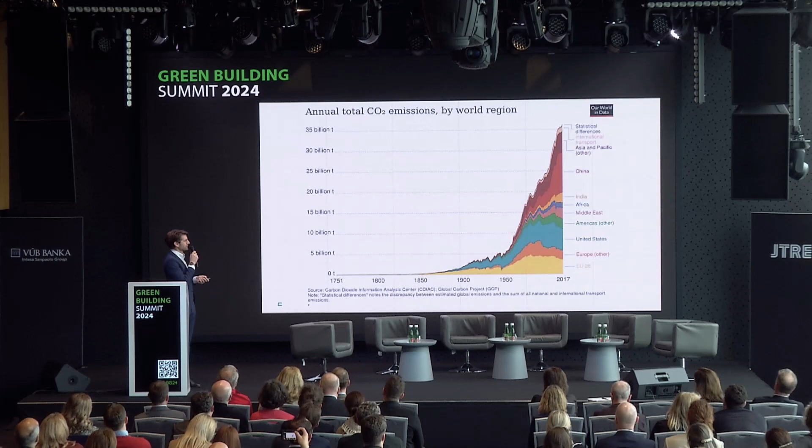And the CO2 is a gas. It stays in the atmosphere. And then the rays of the sun are trapped. And therefore, there is an increase of the temperature of our planet. We don't want that. Or at least we know that the higher the average temperature goes, the worse things happen. And again, we should avoid that.

So right now we are at 1 degree average increase. We should at least stay around this data. And to avoid that, we need to change, of course.

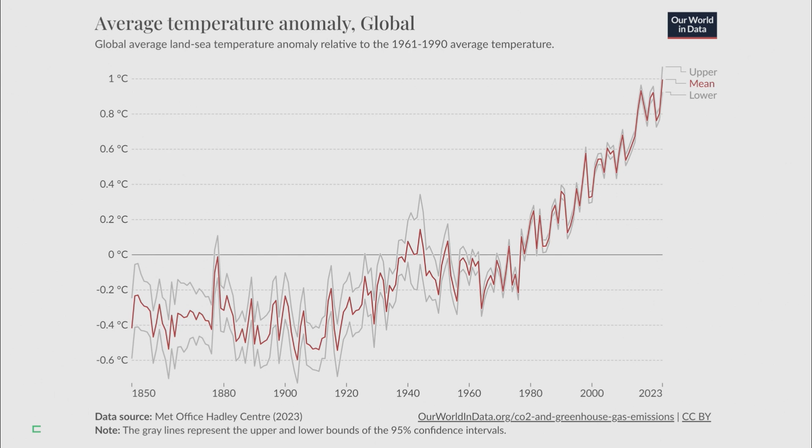And I really like the Casper presentation where there are these 2 dogs and the owner is trying to pull them to the sea, because there are a lot of things that we need to change.

And the world is going to the net zero target approach. What does it mean? That all these countries here have pledged. Finland is actually one of the first. They say by 2035, we are going to be net zero. And net zero means everything, not only construction. We are talking about construction here, but every aspect of our life. So the clock is ticking. We need to do something, and we need to do it fast.

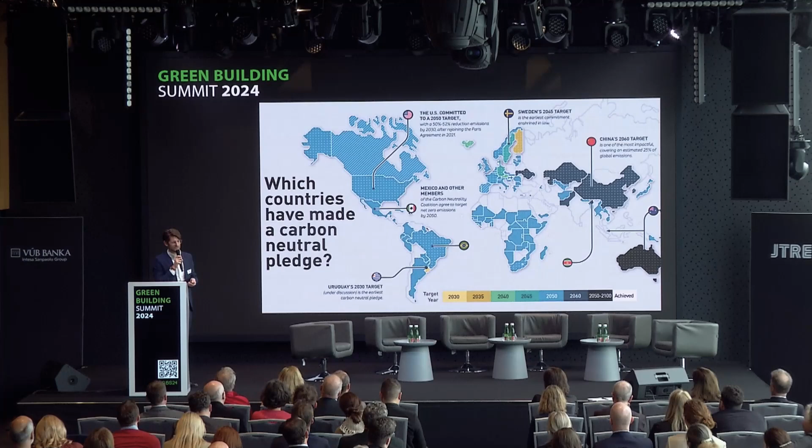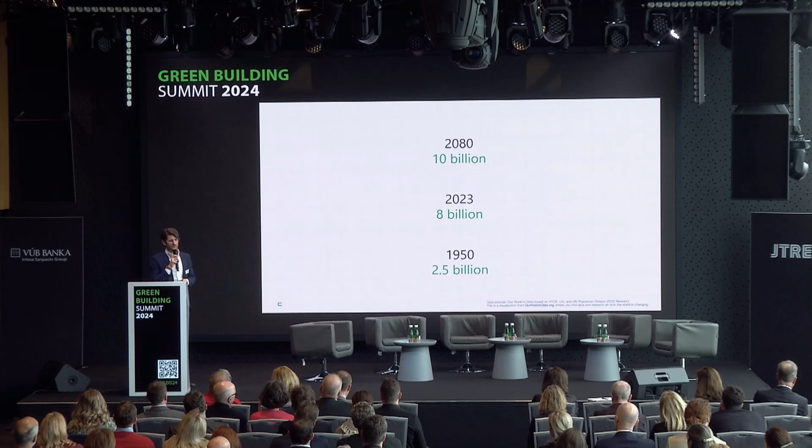And parallel to this, it's true, maybe we will need fewer offices in the future, but the number of people is increasing massively. In 1950, we were at 2.5 billion. Right now, we are 8. And in 2080, probably we will be 10 billion. We need to house these people. We need to have offices for these people. We need schools for these people. And also, maybe in other parts of the world, they look at Western society as a reference. That, I think, is also important.

So what would be the natural strategy to house and build those new projects? Well, until now, we do multi-story timber buildings, and we have actually 5 ways to do that. Here I collected, I mean, maybe there is also steel, but let's keep it to 5.

So we have concrete. Everybody knows how a concrete building is built. Then we also have prefabricated concrete, and there are some interesting examples out there. For smaller buildings, also low-rise buildings, we have timber frame. We have mass timber, I don't know how many of you heard, but it's a pretty trendy material right now. And last but not least, we have timber hybrid, so a combination of these materials. These are the 5 solutions that right now we have to tackle the construction problem.

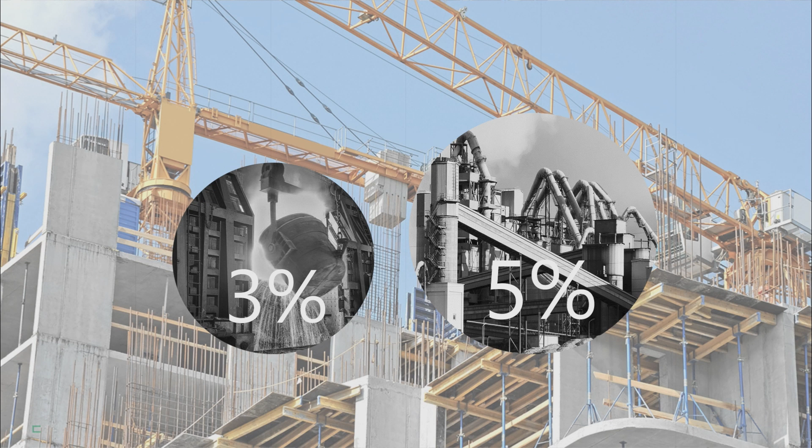And this natural, obvious solution right now is to use concrete. We did it for probably 100 years. The supply chain is there. Everything is organized. But remember the first slide: we need to reduce CO2 emissions. And those 2 materials, concrete and steel, together are 8% of the yearly CO2 emissions of the construction sector. It's a fact, and we need to work around this.

And Mother Nature gave us a gift: it's timber. It's a beautiful material. Finland is one of the great producers of it. And for many years before concrete, we used timber for our construction. And right now, we are also able to do multi-story timber buildings. They are popping out all over the world. That was part of my PhD, to study them, understand them.

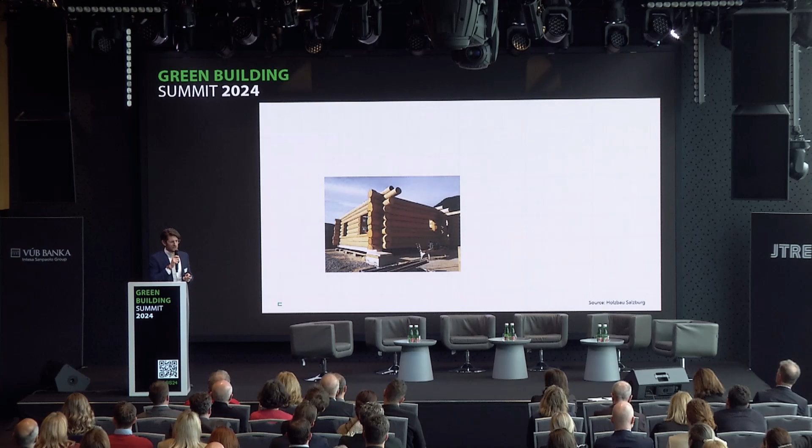But what is important for you to understand is that you can ask yourself, okay, but why did we not build with timber 100 years ago, like the structures I showed you before? Well, it's important because usually the usual process was this one: you take a trunk, you cut it into 4 pieces, and so you have this regular shape. And then the carpenter or the framer would take it and then use it in construction. Simple. It was good for small buildings, but it's a natural material. And engineers, especially in modern times, they really like to calculate things, predict things.

And with this natural material beauty, you cannot really predict it, because maybe there are some knots inside, or some irregularities that you can't really understand.

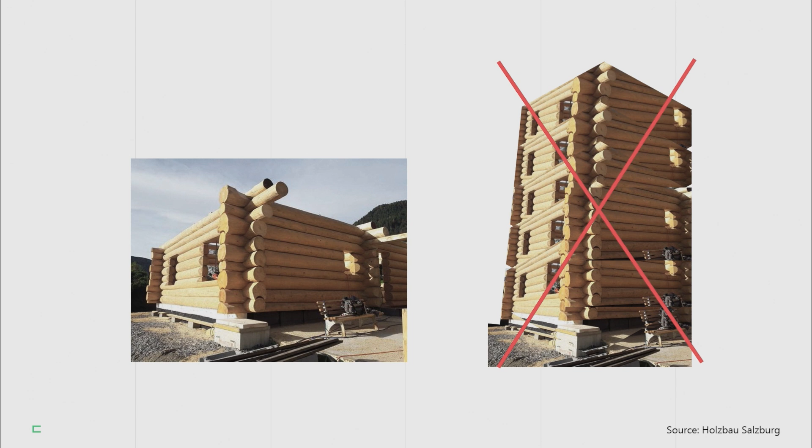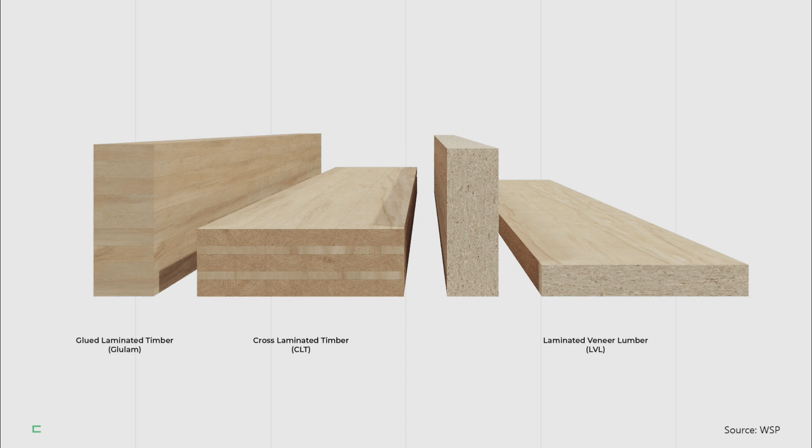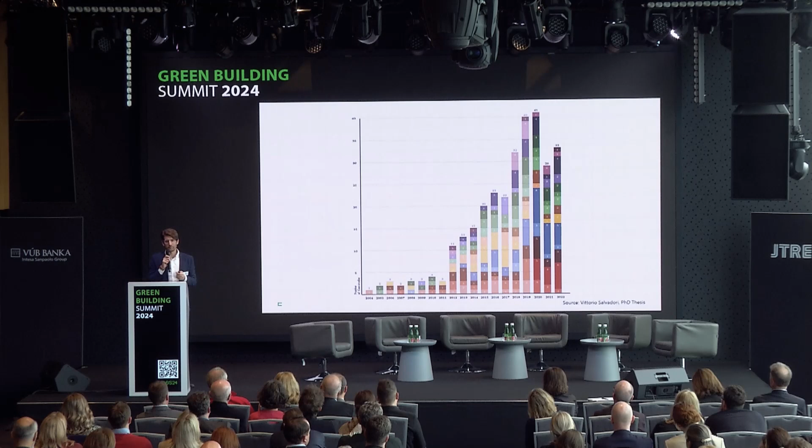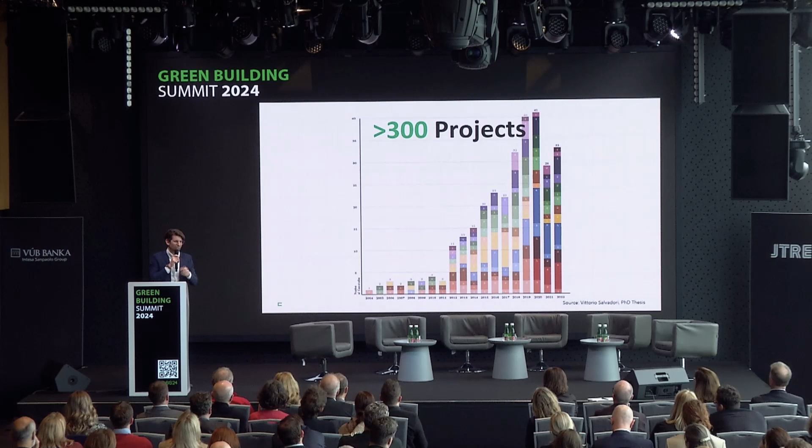This was part of my PhD. So if somebody asks how many multi-story timber buildings are completed in the world, the answer is more than 300. This different color represents more or less the countries. Most of them are in Western societies, let's say. So this was important, and I think it's a good answer for some situations.

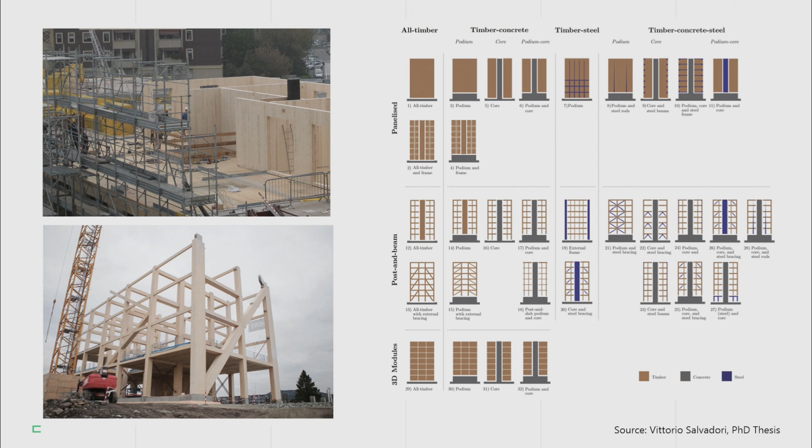You can have load-bearing walls made of timber, or gigantic post and beam structures. This is an example in Norway. What I found out is that there are at least 32 different ways to build multi-story timber buildings. Actually a lot of them are hybrid, and I'm coming to that a little bit afterwards. But let's pretend for the sake of it, it's okay like this.

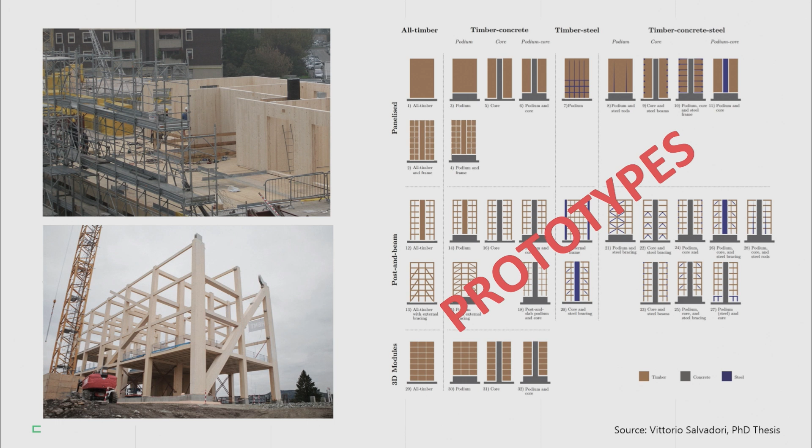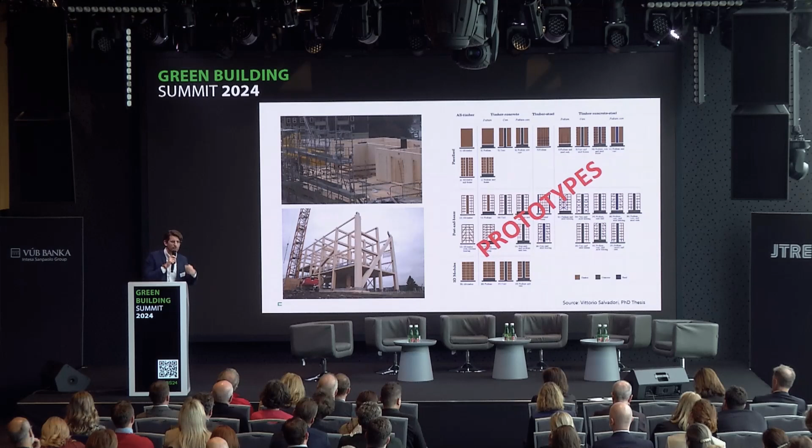What's the problem? Remember, we need to find a solution, and we don't have time, to scale sustainable construction. All those buildings, or most of them, are prototypes. What does that mean? A developer commissions an architect who comes up with a project, then commissions a structural engineer, who bases calculation on this specific project, and then they contact the supply chain. That was good, and it's necessary to do this, but if we want to scale, this is not the right approach.

Why? Because you need to reinvent the details and the connection every time for most projects. So if you remember the 5 options, let's look at them together. If I want to scale construction, what could I do? From a time perspective, what gives me the quickest construction possible, especially now with high interest rates, that would be an advantage. Well, prefabrication is the right approach.

Concrete buildings are very slow, everybody I think has experienced that. But they're cheap, the supply chain already exists, so of course they're cheaper, some countries a little bit more than others. But the problem with mass timber is that it's a sustainable, beautiful material, but it's expensive. Remember, some of these products are only 20 years old, so the supply chain is developed, but not as we want to scale, especially globally.

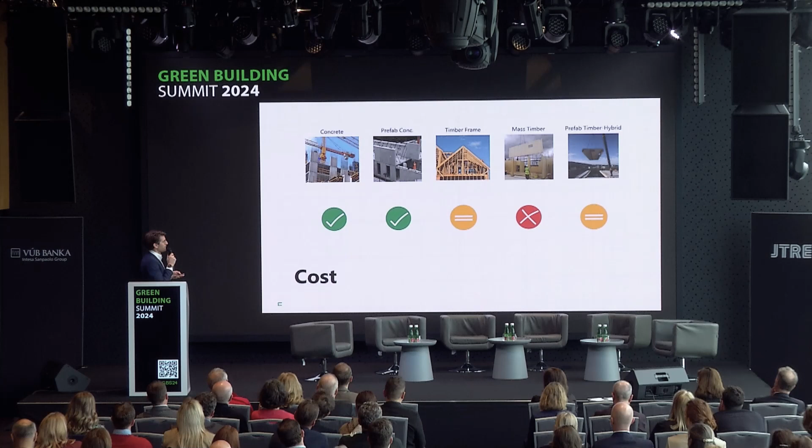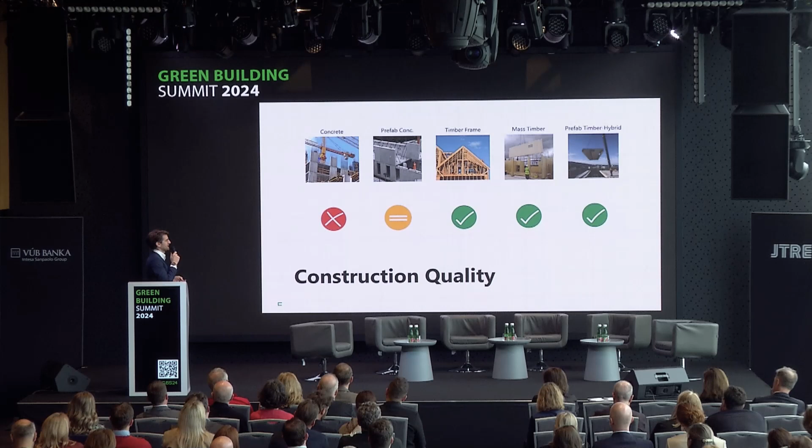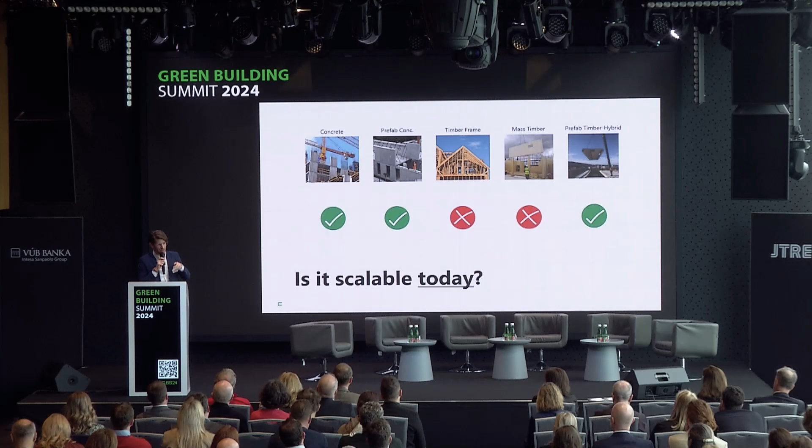And if we look at the quality of the buildings, timber wins hands-down. Because construction, especially with concrete, you need to repair, there are some uncertainties on the building side, and you need to change it. Prefabricated timber hybrid, in this case, wins especially well. But if we need to find a solution that is scalable today, remember, today, and I will show you the example of CREE, well, you need concrete, prefabricated concrete, or prefabricated timber hybrid, because it uses a low amount of timber in this case.

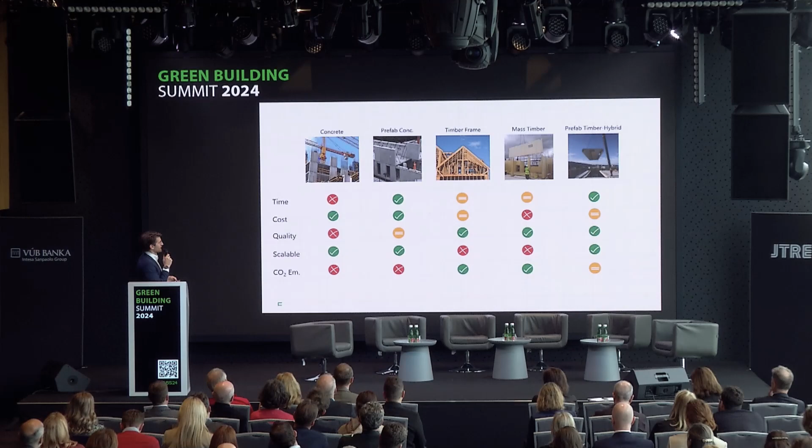Last but not least, okay, we found 3 alternatives, but what about the CO2 emissions? Well, we say that concrete and prefab concrete are actually bad for the environment, so we need to find alternatives. If you look at the options we have, this is the overall sum up, but we can remove timber frame. Why? Because it's not scalable for multi-story buildings.

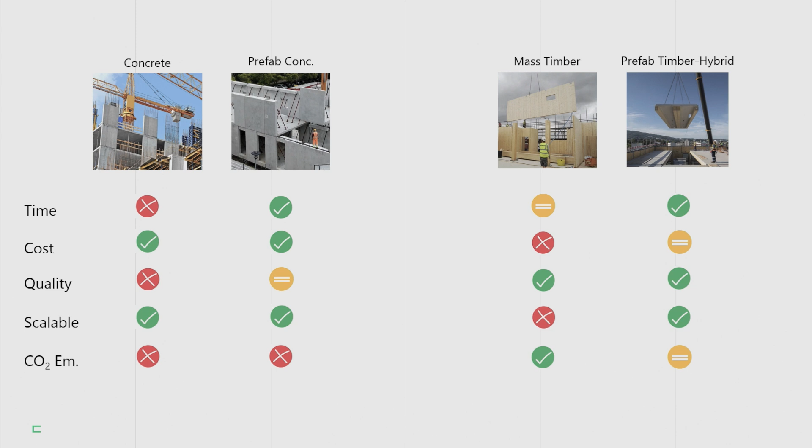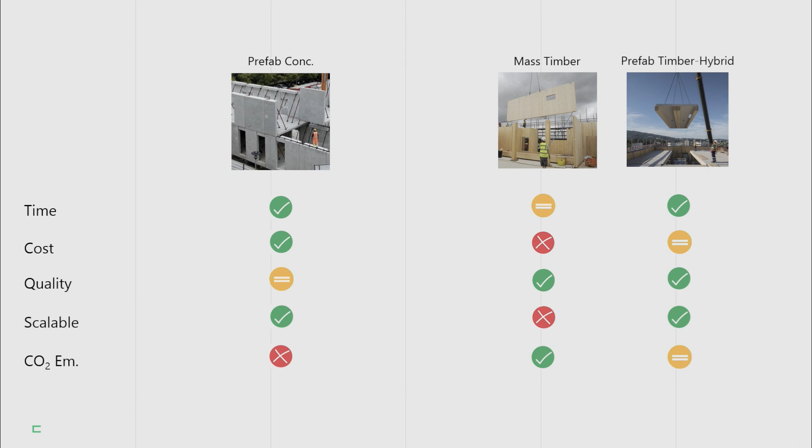Yeah, you can do low-rise, but not high-rise. We can remove concrete because, yes, it's cheap, but it emits a lot of CO2, is imprecise, and the construction is very long. We can remove mass timber because, yes, it's sustainable, probably the most sustainable material we have, but it's not really scalable, and that's what we are searching for.

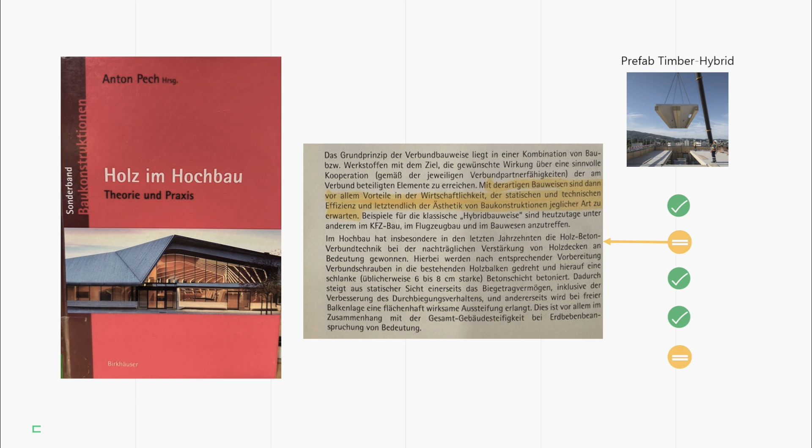So we are left with 2 options, prefabricated concrete or prefabricated timber hybrid. There is one winner here, and in our opinion, timber hybrid wins. But there is a problem, and it's the cost part. We know that real estate developers ask us, okay, but I have two options, prefabricated timber hybrid and concrete. Why should I choose something that costs more?

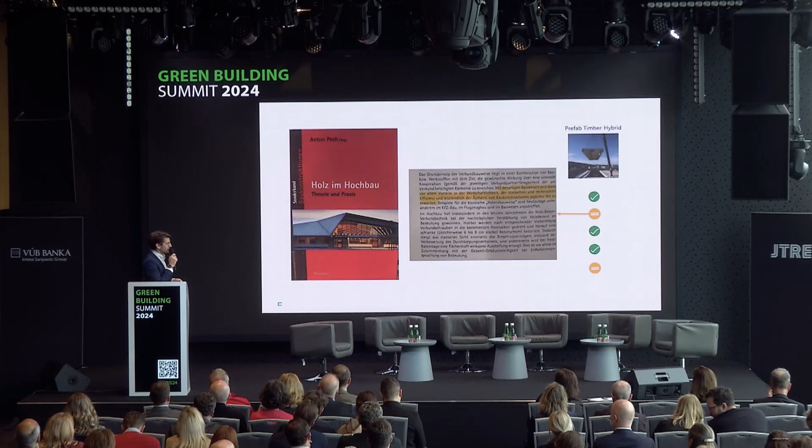It's true, it costs more. But what the academia says, and also the practice, is that timber hybrid is perfect for construction quickly, high quality of the building, and also supply chain, but has high engineering costs.

So it's a particular solution, and you need to rely on expert companies, people, and stakeholders to manage such a building. That's when CREE comes in. Because what we do is say: client, we already figured out all the details, all the standards. We reduce the engineering entry cost by using a system, because it's a systemized approach. And what we did already 12 years ago is exactly that.

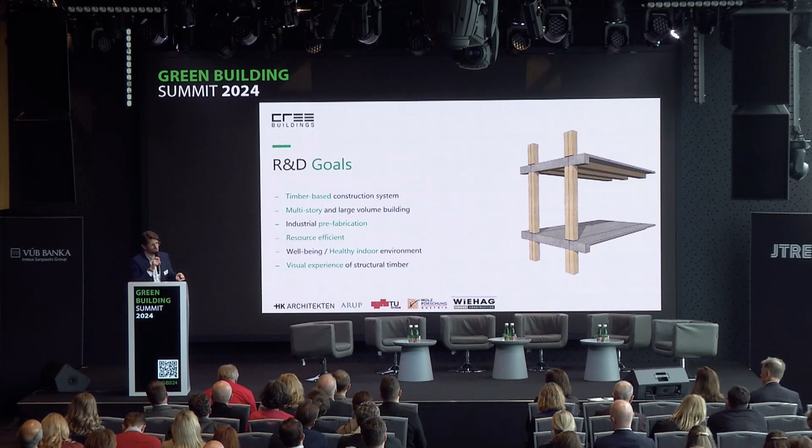We searched for a solution that is timber-based, perfect for multi-story, good in prefabrication, and resource efficient. What does it mean? I'll show you some data, but we use the right amount of material, not too much and not too little timber. This helps us scale it and reduce the cost, which is important. Last but not least, we want timber to be visible for the quality of the users, as Casper said before.

So the story, the journey of CREE is composed of three parts. We have 3 years where we developed our solution. Then we have a part where we mastered the CREE system by building our first reference. At the time, that was the tallest timber building in the world. And then we mastered the solution by operating as a general contractor, building different typologies, assets, and in different locations.

But after that, the success of our solution was big enough that construction companies were asking us: okay, I understand your system, I can see it implemented in Singapore, in France, in Canada, teach me how to do that. That's why we changed our business model and became a consulting company. We are involved with any stakeholder on the project, no matter where we are located in the world, and we teach them or suggest our solution in order to reduce the cost and scale it globally.

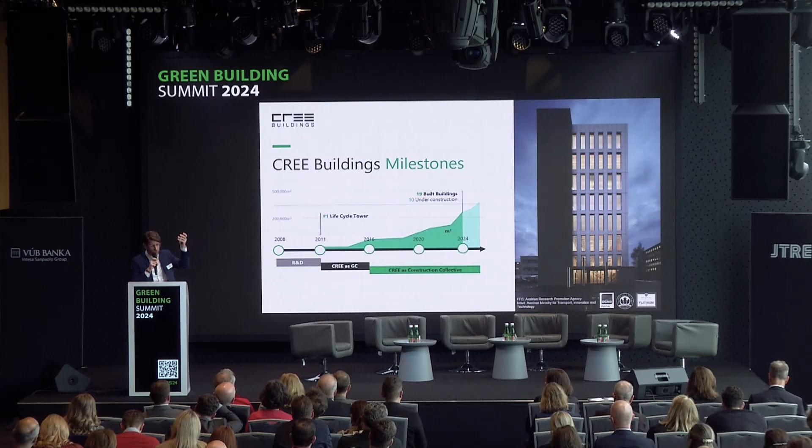This was a good idea because now we partner with construction companies all over the world, and we have completed 19 buildings, with 10 under construction right now. Remember, if we need to find a solution that scales, CREE took 10 years to scale. Now we are seeing an increase, but the fear I have as an expert in timber buildings is that yes, we can develop a solution now, but the time it takes to scale is 10 years.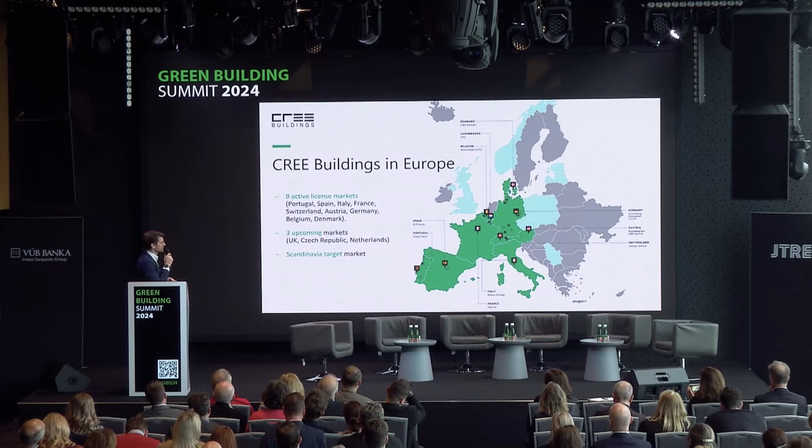And Finland needs to be net zero in 2030. We don't have time. So now we operate in Asia and North America as well, but here you see the location—we are present in Europe, not yet in Slovakia. Maybe after this presentation we can find some partners. But overall, we are strong in Germany, in Spain, all over these developed countries.

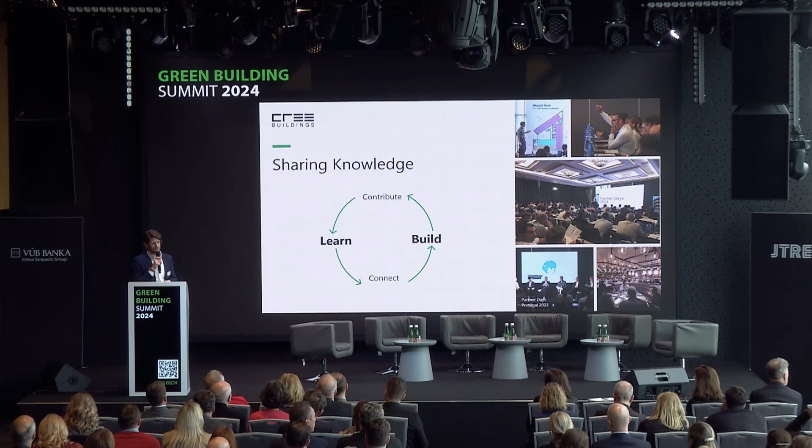The key aspect of CREE, the key message we share with our partner companies, is that if you team up with us, you need to tell us everything you learn in these projects. Every CREE project has new technical details, new innovations, and our role at CREE is to collect information and share it with all our network. This is a true network effect, and so the learning curve of the entire collective is much higher. We also meet once a year to discuss all that stuff.

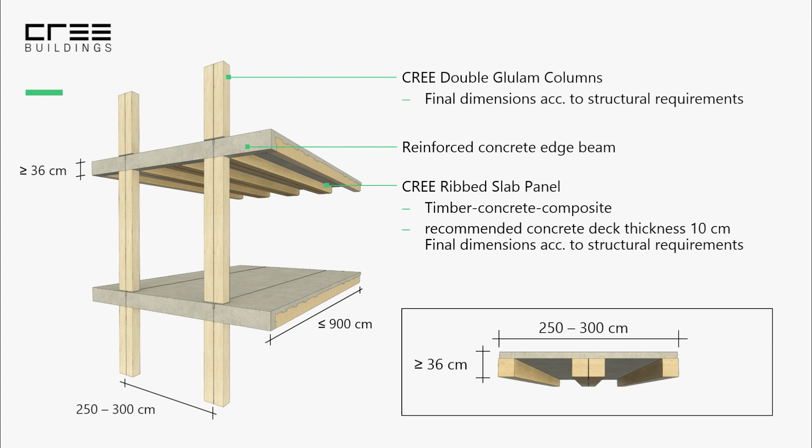So what is the CREE system? You saw a picture before. It's a post and beam structure, load-bearing mass timber columns, connected with concrete timber prefabricated floor slabs, in a nutshell. Here you see between 2.5 and 3 meters and a 9 meter span. These numbers can change, but because we prefabricate the element from point A to construction, we need to transport them, and we compete with concrete, so we need to be as cheap as possible. So what we figured out is that if we stay within this measurement, we can transport the element without special permissions, and this reduces the cost.

Usually a CREE building is composed of a core made of concrete, but you can imagine different things too—our Japanese friends do it with steel. You always have the columns which are directly attached to the external facade. This is a key aspect when we assemble the buildings on site. Middle girders are made of steel or concrete, and then the floor slabs close and seal the building.

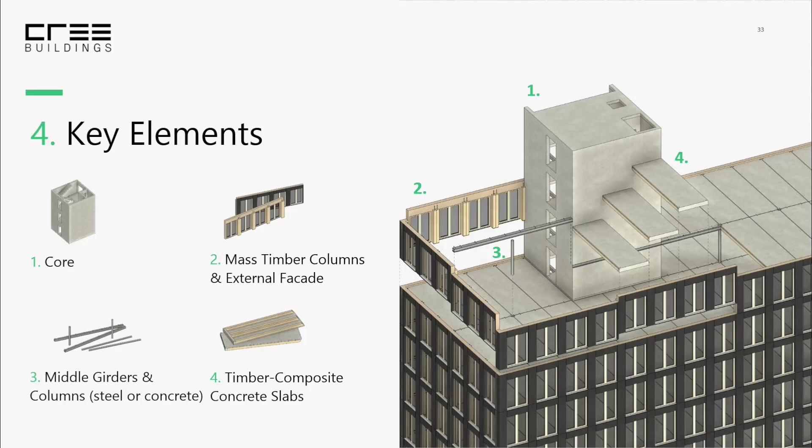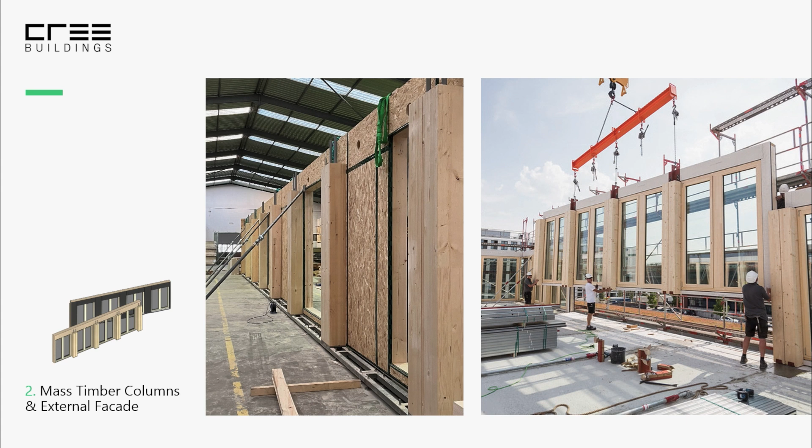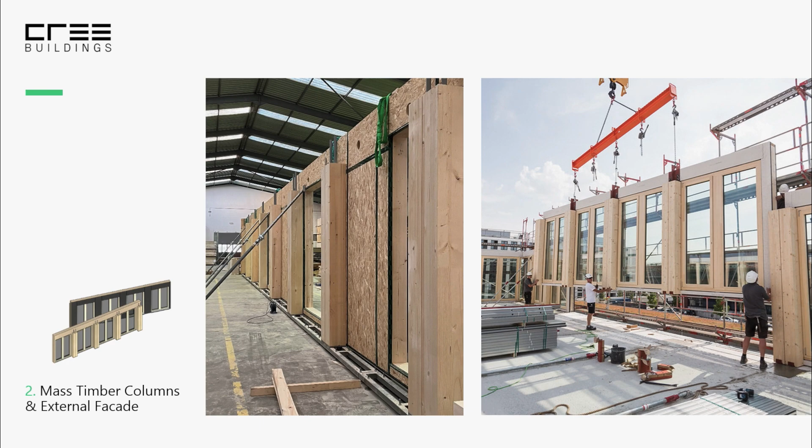This is a picture from Portugal. The Portuguese didn't have a lot of timber knowledge, and what we did is transfer the know-how to develop prefabricated timber elements and bring them on site like you see on the right. This knowledge is coming from Austria, it's pretty common in Germany and Switzerland as well, and our job is to transfer these capabilities to any company that wants to work with us, already in the first project.

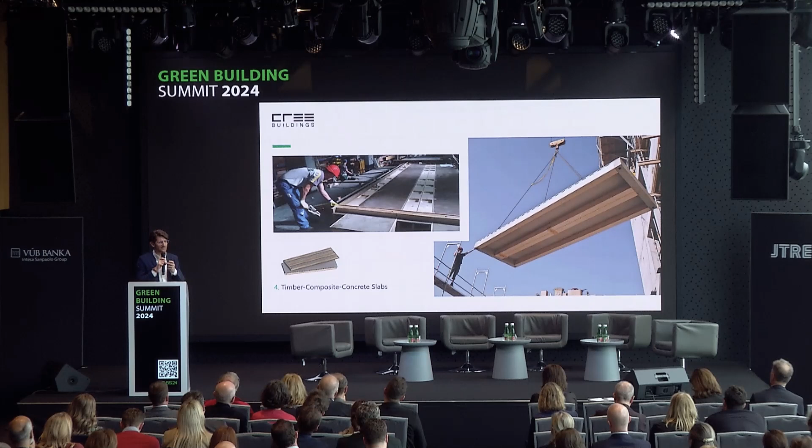This is a picture from the off-site production facility that we can set up in any country in the world. We did it in Singapore, Canada, and Europe. On the right, you see how the element is brought to the building site.

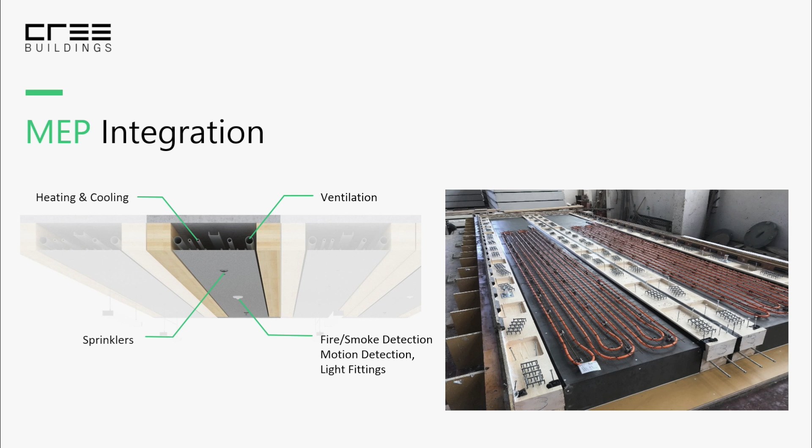We also integrate heating and cooling. For example, a new thing that we started in Germany is to put heating and cooling pipes in the concrete layer before we pour concrete. So we have a low-tech solution, and the moment the element arrives on the building site, it's ready to go, to warm up or cool the building.

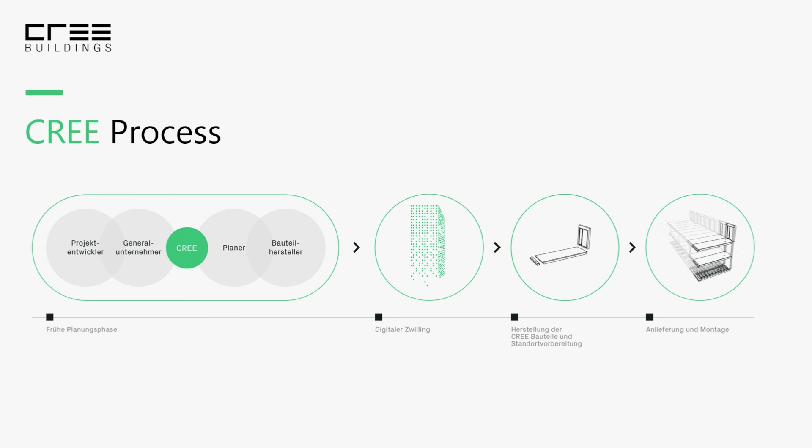What's the trade-off? Everything fine, everything nice, but if you're a developer, what do you need to do to achieve scalability, sustainability, and cost competitiveness? Well, you need to involve us, or companies like us, early on, because we can tell our clients early what could go wrong. We build up a digital twin, we quantify the material, and then we assemble the building pretty fast because we know the components.

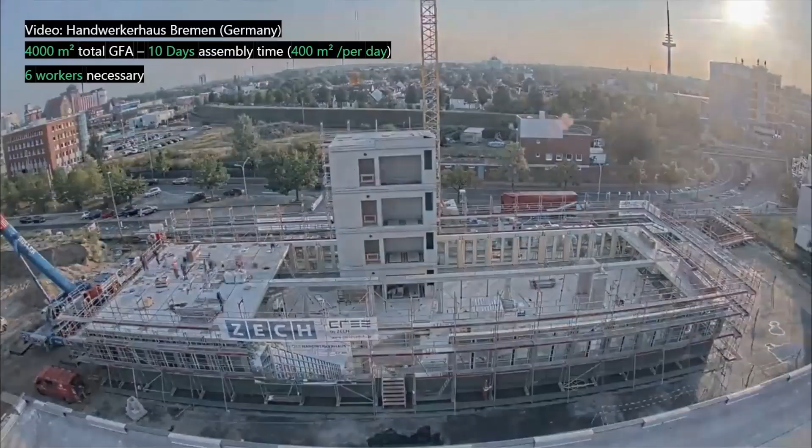This is a video of a 4,000 square meter building in Germany, completed 4 years ago. The client followed our suggestions and it was assembled in 10 days with a crew of 6 people. That's another big challenge, we don't have the workforce on the building site. Well, here you need just 6 people.

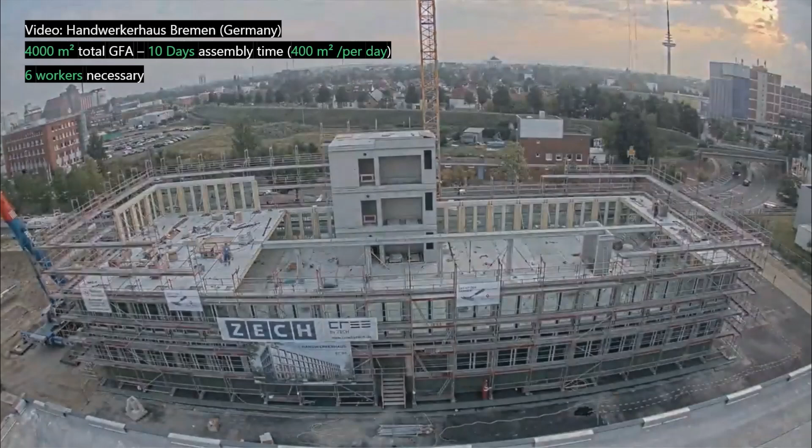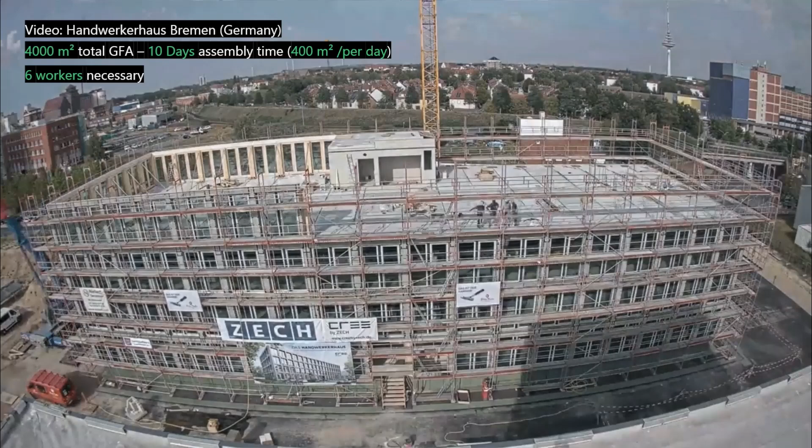The core will assemble 2 weeks in advance, and then the process is always the same: you place the facade with the load-bearing columns, the middle girder, and the floor slabs, again and again and again. Especially on the last floors, it gets really faster.

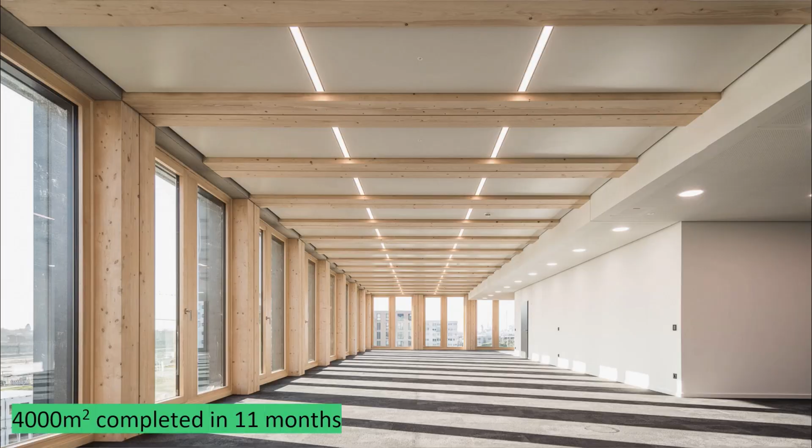What do you get? You get a building that, after you seal the floor slab, is water and airtight. And the interior, in this case after 11 months, looks like this. This is a typical size for any multi-story building in Europe, and we completed it in 11 months.

With timber present, yes, we use concrete, but timber is the protagonist in our buildings, and it brings quality also inside. So we've built several buildings, more than 30.

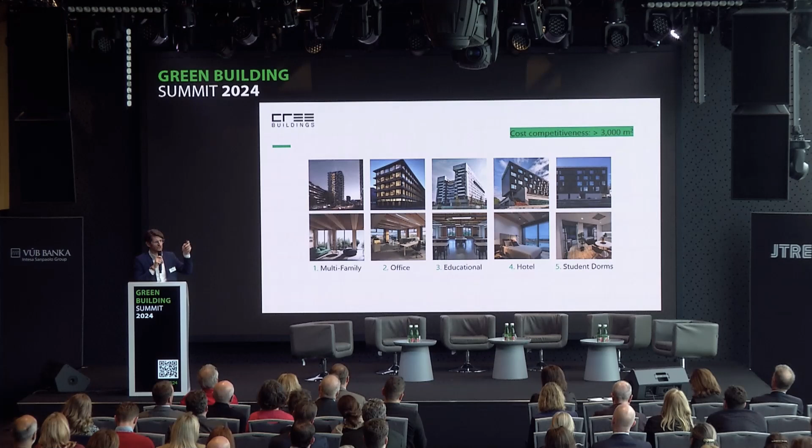What I want to show you today is that we are really good in multi-family, offices, educational buildings, hotels and student dorms, because they're very repetitive. What drives the cost of a CREE building is the floor slabs, because it's 70% of a building. And the more repeatable the floor slabs are, the lower the cost per unit. This is really good, especially in those assets over 3,000 square meters, because you can repeat the floor slab as much as possible.

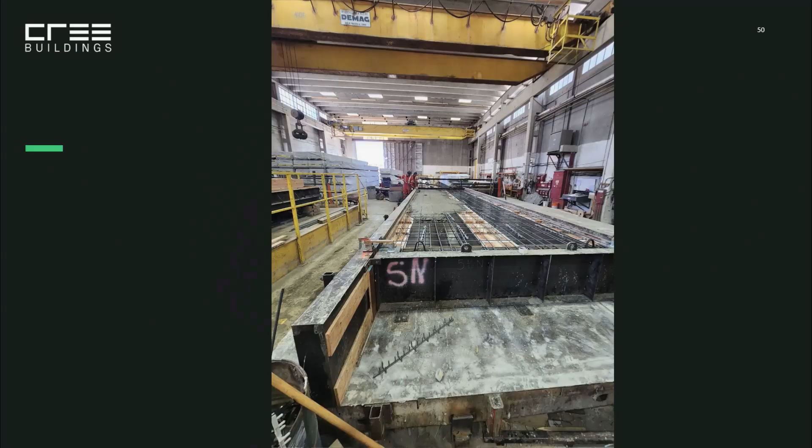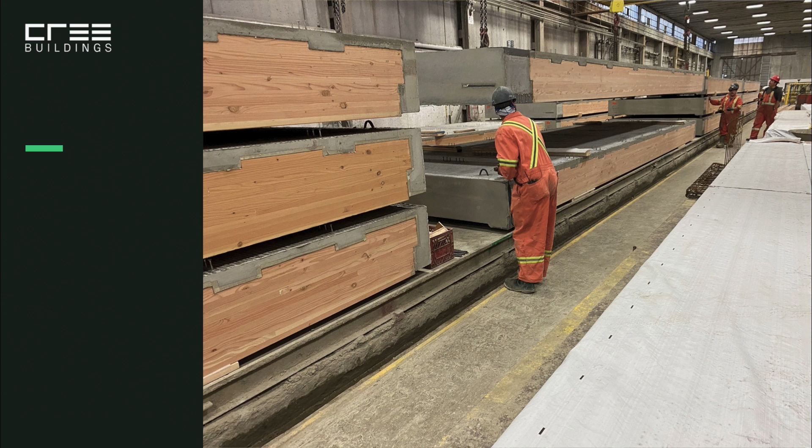And the story of this building is always the same. CREE, together with a local Canadian partner, searches for a local precast company that never did timber hybrid construction. We teach them how to do our solution. We also have a patent to do this. And here you see our Canadian friends producing the elements.

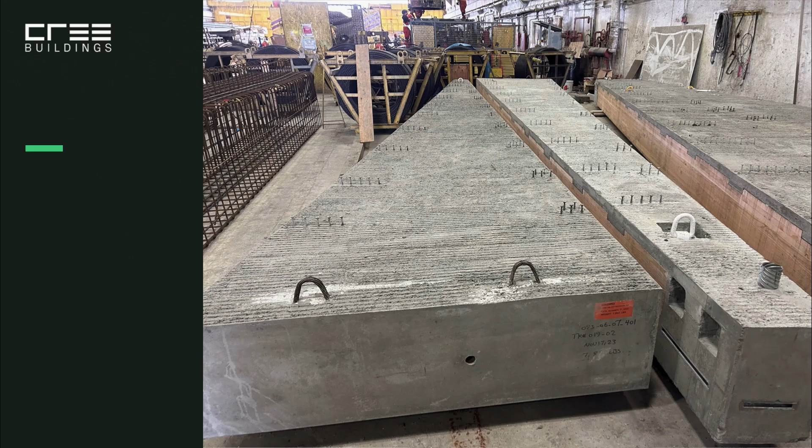There's also some degree of freedom to prepare in advance some pipes, connections, and so on. My technical department doesn't want me to show you these pictures, but just for your information, we can also do some specific parts.

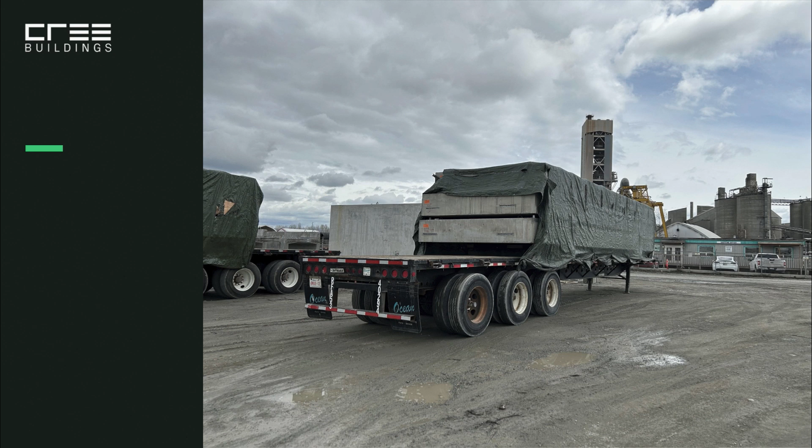It's a little bit harder, but it's possible. And then you bring these elements, usually 3 to 4, with a truck, possibly near the construction site. And this is the construction site. The core made of concrete is already there. And here you see how, I don't know if 1, 2, there is only one person that assembles the floor slab. It's pretty simple.

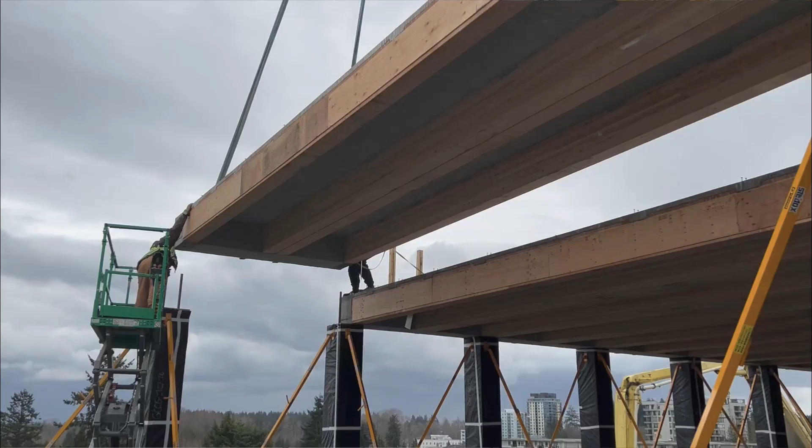A crane picks it up, keeps it up, and then they position it on the building site. These are our videos from, I think, 2 weeks ago. Here you see the CREE secret, let's say, the CREE connection is really what speeds up and guarantees precision on the building site. And here you see that the floors are guided. They have holes left and right. And through these holes, they guide the floor slabs onto the column, which is timber. And then you seal the connections once the floor is in position.

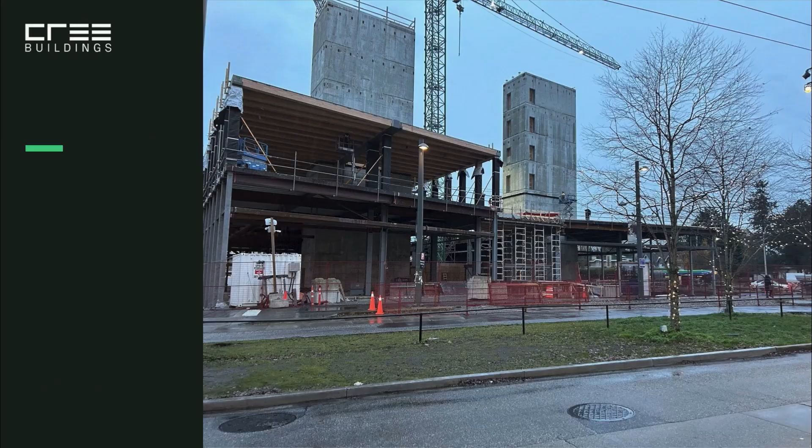These are pictures from December. Again, we have a Peikko Deltabeam in the middle. And these are pictures from now. In this case, we don't have the facade, which are made directly on the building site. We advised the client not to do that, but that's also their choice. You lose a little bit the advantage of CREE because timber stays a little bit exposed. And that's why you need to cover and you lose some erection time. But I'm pretty sure that after this project, they will change their mind for other projects. This is the final result. It should be ready by the end of this year.

Another project which we completed in a completely different environment in Portugal, different climate, different companies. The first is for a chain of hotels called B&B, and after this they were happy enough to do at least 3 other buildings with us. It's composed of 2 buildings, again similar size to the video I showed you, 4,000 square meters. One is a hotel, one is a student dorm. And we took 8 days to assemble 1 block of these buildings. The story, again, is always the same.

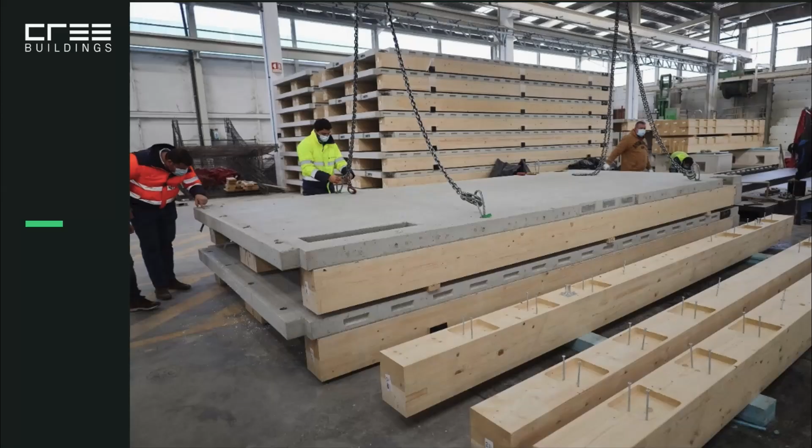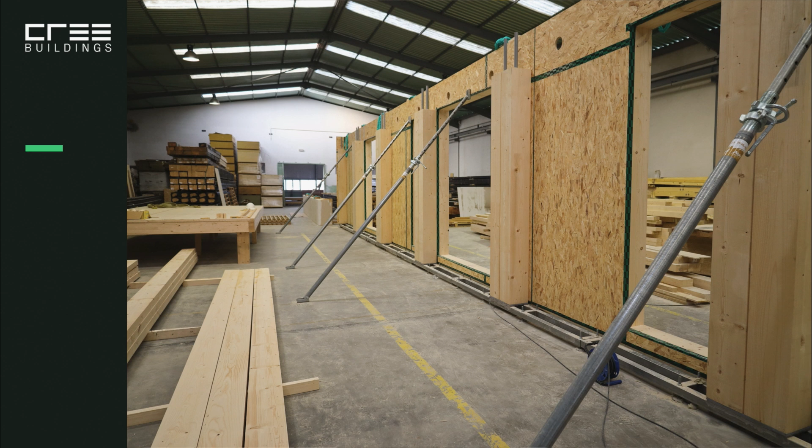Our partner in Portugal ordered timber from Spain. These are the beams that you see on the bottom right. And then they produce the floor slabs. They store them safely at their facility. And then they brought them to the building site. Always the same solution. Companies use our system because the details and the process are always the same. After 3 buildings, usually they don't need our support anymore, besides the sharing of additional details that other partners produce. So these are the facade elements produced offsite by our partners.

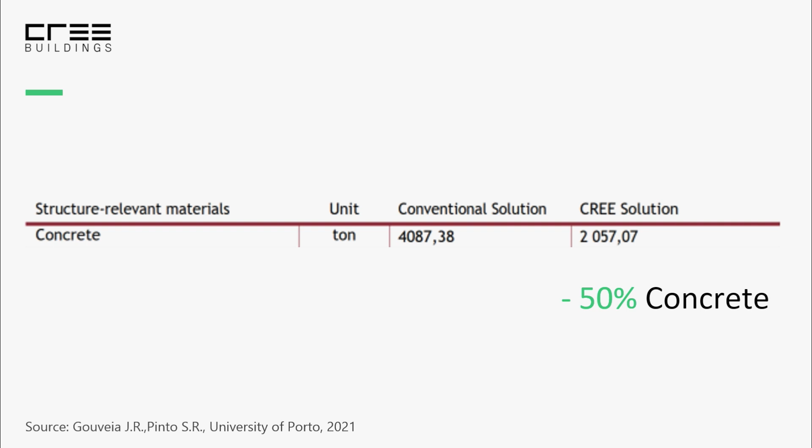These are other pictures. And as Jakob said before, reduce, reduce, reduce. That's how we reduce. This is how we scale sustainable construction. Because with CREE, the University of Porto proved that compared to a standard solution, we reduce concrete by 50%. It's not 100%. That's fair. But if we want to scale sustainable construction today, that's, in our opinion, the only way to do that. Reduce. Reduce steel, minus 41%. And reduce waste. A CREE building has 60% less waste on the building site.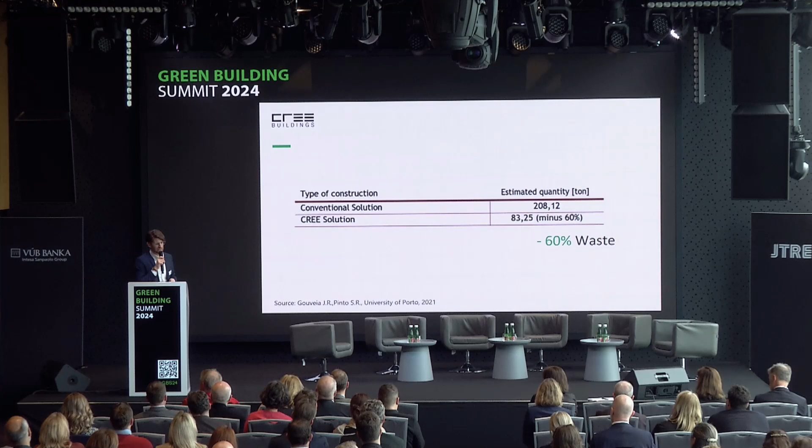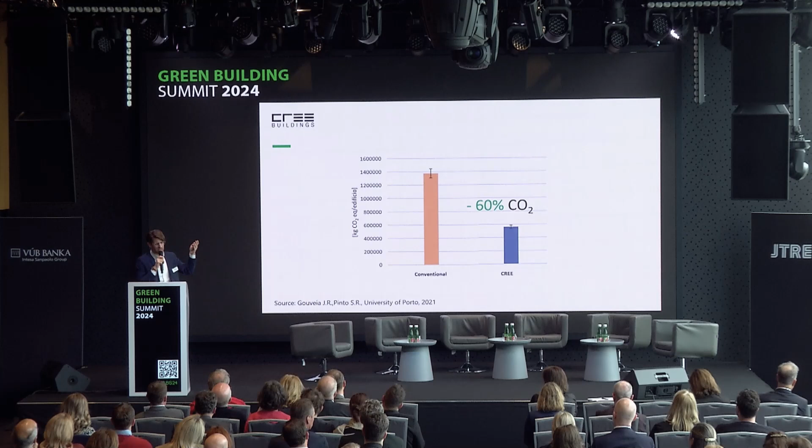Think about the quality of the building site. Think about the safety and the sound. Usually, nobody really complains about what we do on the building site. And last but not least, of course, we reduce CO2 emissions by 60%. Again, is it 100%? No. But if we want to scale sustainable construction, these are the tools that we have right now, and maybe in 10 years, we can improve the system even further. Last two projects.

This is EDGE Südkreuz. This is completed in Berlin. It's the most sustainable office building in Germany. The client didn't listen to us at the beginning. We said, you need to make decisions early. They postponed some important decisions, and the building cost more than conventional.

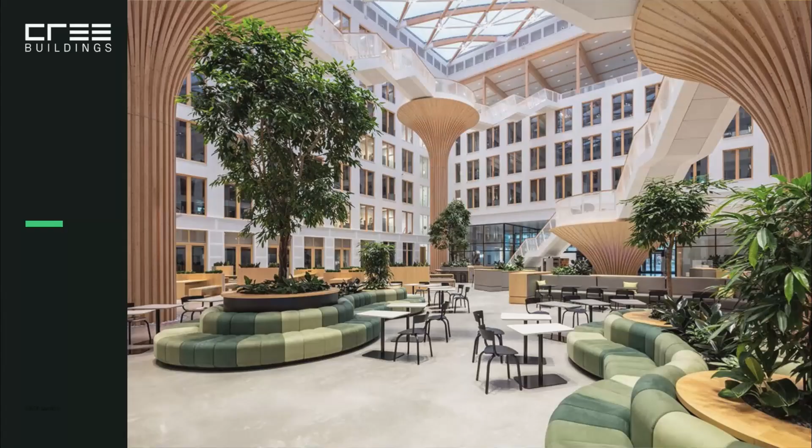That's true. But the building is such a unique building, typical CREE structure, left and right load-bearing columns, middle girder in concrete and timber, that the final result was such a unique building, unique asset, that they sold it with a premium. And the tenant, a Swedish company, in less than one week rented the entire space.

They keep, of course, most of the office for them. But this is what the market asks already right now. And it's not so easy to deliver such quality and sustainable buildings. This is the typical work environment. Maybe that's what the public company in Finland would like, timber exposed.

And to conclude, I have two minutes. To conclude, what's coming next? So I told you that we are good in multi-story, we are good in office, but we know that the demand, especially in the coming years, is also residential. And we want to give tools to architects to play with our solution with elements already considered in advance. So we teamed up with a Danish architectural office called EFFEKT.

And together with other companies, we came up with a solution that is composed of a kit of parts. These are the parts. You have the floor slabs, typical of the CREE system. You have the prefabricated facade with the load-bearing columns. And then you have your partition walls. And then they also pushed the building even further. Let's think about the furniture. Let's think about the service appliances and so on.

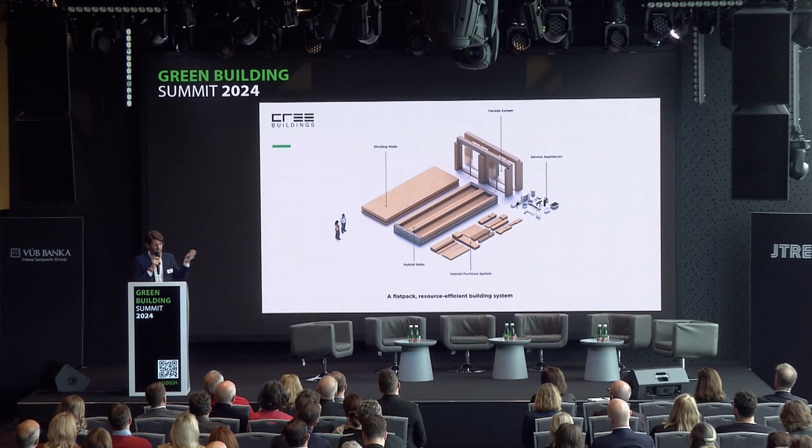So really, let's give architects, and any architect in the world can use those systems, and let's play with this. And what can we do if we imagine the building in this way? So we can compose it to have different volumes, different buildings. You have towers, you can do low-level buildings. You can have different types of facade. You can have also different types of units.

You can think about maybe just a studio for one single student, or maybe a combination of various floor slabs and so on. Everything is already figured out. They need just to play with the Lego approach. And what I really liked is that, to lower the cost as much as possible, to make it accessible, EFFEKT thought of the building in a different way. Let's grow the building together with the tenant.

What does it mean? This is the picture when you buy the project, and this is maybe five years after, when you change job and you increase your income, and this is when you maybe get married or find a new partner. And so the flat lives and grows with you. And maybe this is a strategy to reduce cost at the beginning and then increase the life of the building afterwards.

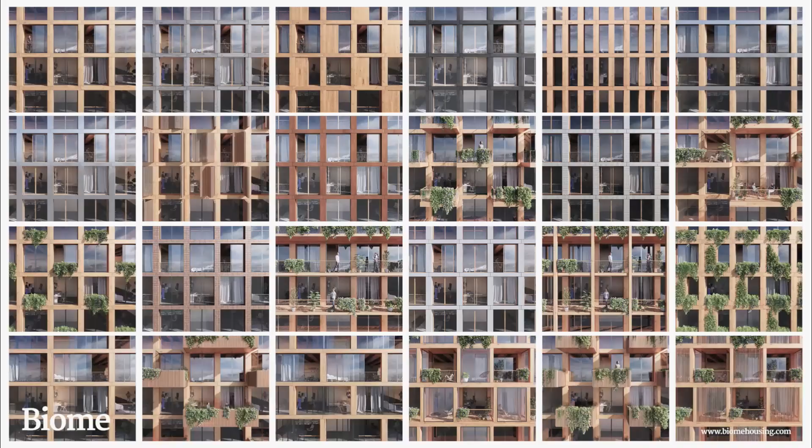What you obtain, this is an example of a livable place that is created just with a combination of a system, but it gives freedom. And for example, you have various types of facade that are possible. It's pretty flexible, and it's going to be implemented for the first time in a 65,000 development in the Netherlands, in Groningen. And EFFEKT is working actively on that. So CREE, if it does something, it does it very big.

But what I want to show you today is that scalable is possible. We should not use utopian ideas, but we should really focus on what we have. So we have a supply chain of concrete. Let's add timber. But let's see the building in a different way. And I'm not a fan of always comparing the car industry with construction. I know it's different. But what I like to change in the idea of our clients is that, yes, a car is successful because it has a standardized assembly, always the same process, of different components, right?

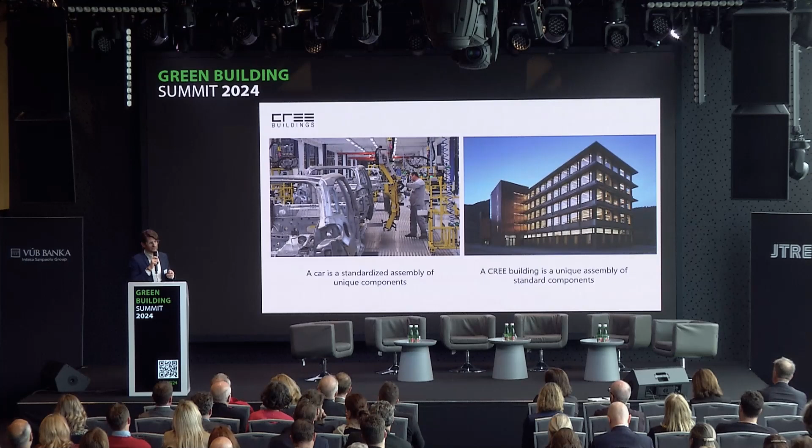To be as successful as that industry and increase productivity, we need to think of the building in a similar way, but assemble a building in a unique way with standard components, this floor slab, the facade, and so on. And in doing this, you can still have freedom, and we think that if the goal is to scale sustainable construction, that's the right way to approach it.